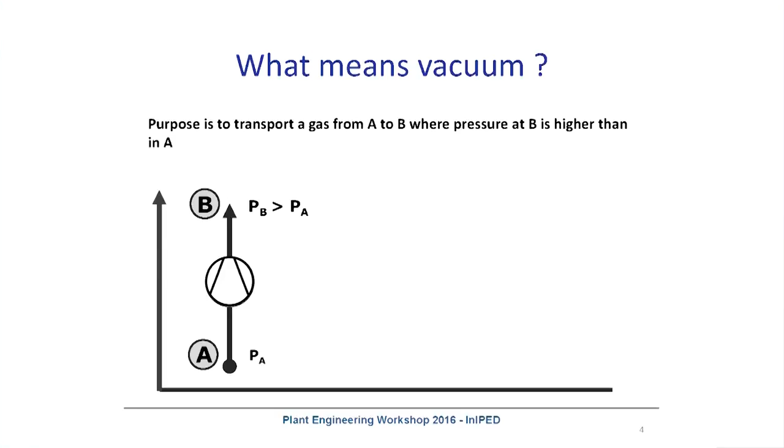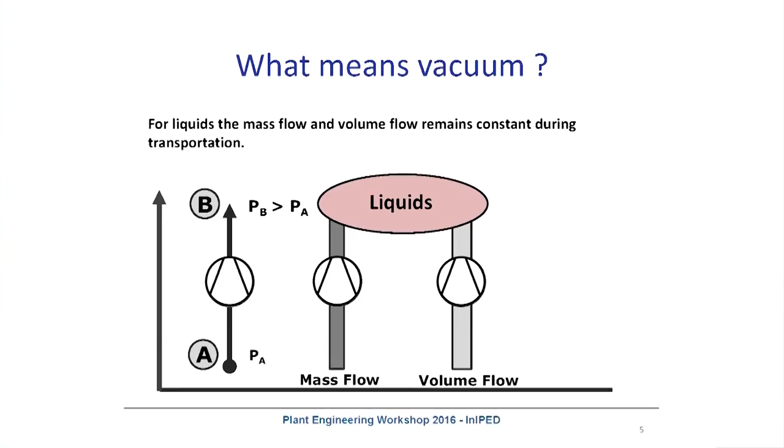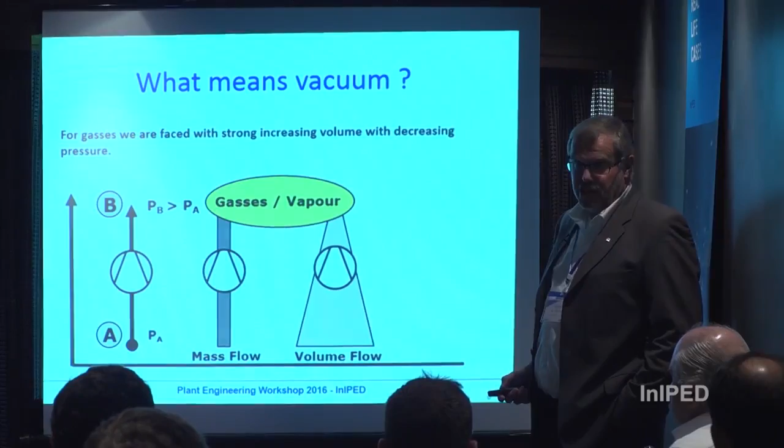What means vacuum? In principle, it's the same as with centrifugal pumps. You bring a gas from point A to point B, where the pressure in B is higher than in A. Sounds very easy. With liquids, we have a constant mass flow and a constant volume flow, because liquids are not compressible. With gases, the mass flow is also constant, but the volume flow is decreasing as the pressure rises. That means when you go down in vacuum, you go down in pressure, and you need a big pump to handle the big volume.

Yeah, so this is exactly what it shows. Normally, when you go down in pressure, you need a bigger pump, looking at the volume, than at the higher pressure ratings.

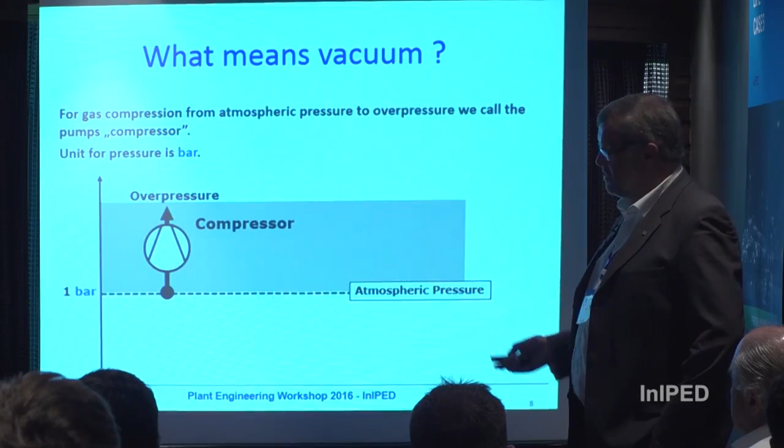When do we talk about compressor and when do we talk about vacuum pumps? There's always a discussion because the machine looks very similar and is more or less the same. We always talk about a compressor when on the suction side we are in the atmospheric range of pressure, so we compress the gas from atmospheric pressure to overpressure. Typically we talk about bar as a unit for the pressure then. When we talk about vacuum, we mean a pump which handles pressure below atmospheric pressure and compresses it to atmospheric pressure. In this case, we normally talk about millibar, and that's the major difference.

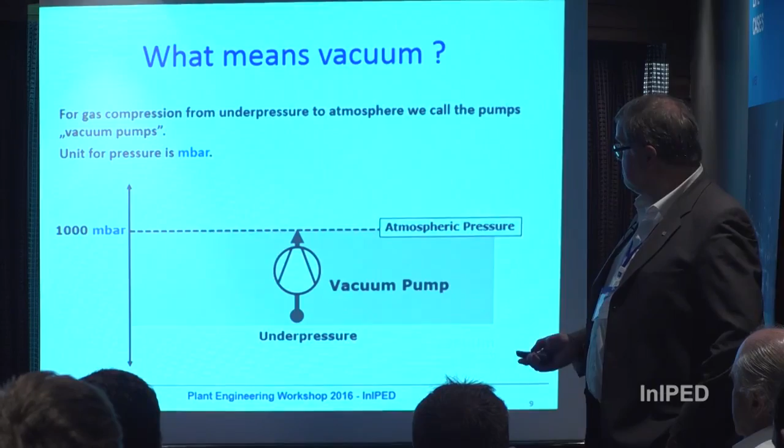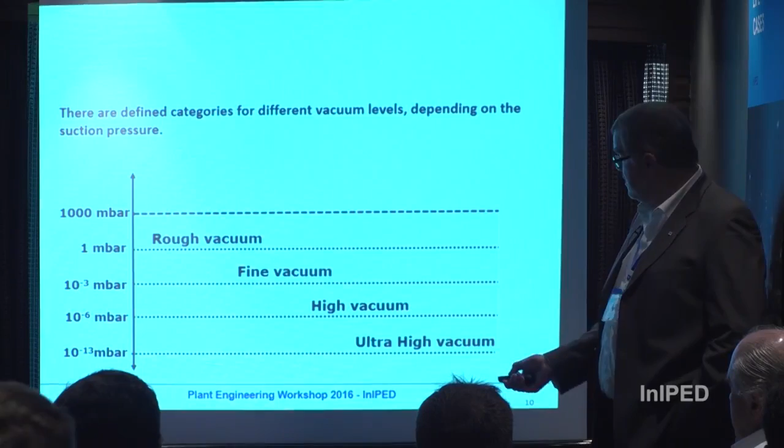On the vacuum side, we have different steps of vacuum which are defined. We have the so-called rough vacuum, which starts at 1 millibar absolute and up to ambient pressure. The fine vacuum goes down to 10 to the minus 3 millibar, high vacuum 10 to the minus 6, and then ultra high vacuum to 10 to the minus 13 millibar. For the applications mentioned in the beginning, in chemistry, petrochemistry and so on, we're normally talking about the range between 1 millibar and atmospheric pressure.

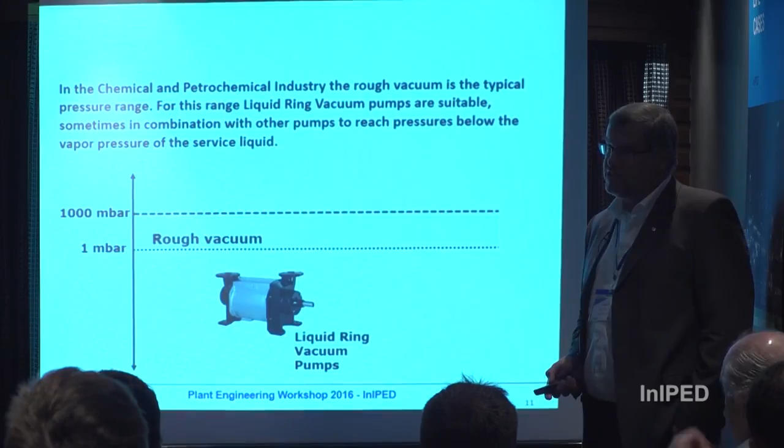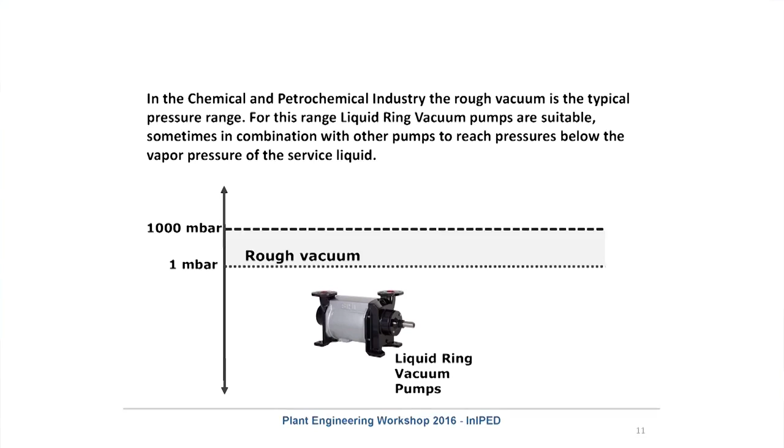In this pressure range, liquid ring machines are operated. For lower pressures, liquid ring machines are normally not suitable, for reasons linked to the operating principle with the service liquid, because you can decrease the pressure only down to a level slightly above the evaporation pressure of the service liquid. Otherwise the pump would fill with steam and would be blocked by the steam and cannot operate anymore.

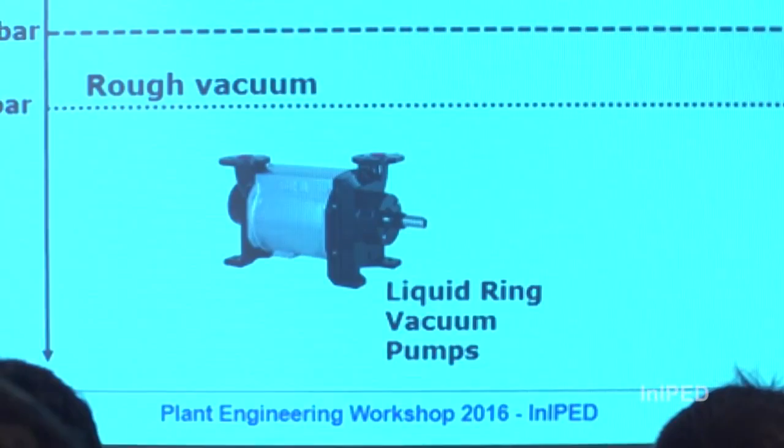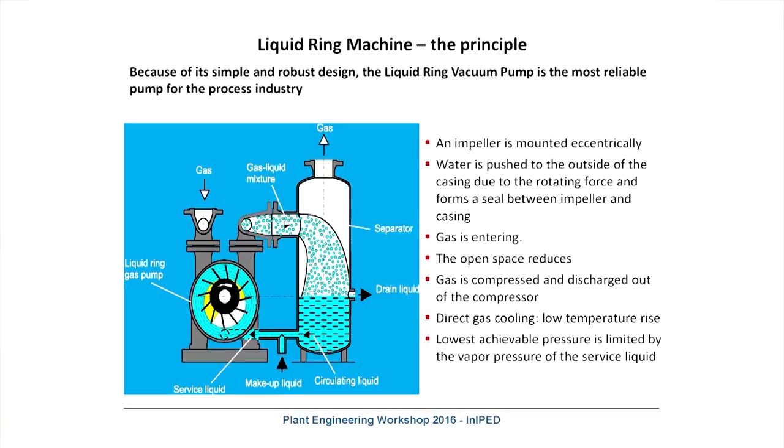Working principle: a very simple picture to show how this machine is running. An impeller is mounted eccentrically in the casing. Due to the rotating forces, the service liquid is pushed to a ring concentric to the casing. That means, when rotating, you have on one side an opening volume between the impeller blades, the liquid ring, and the hub. In this stage, the gas is being sucked in due to the increasing volume. In this stage, the gas is being compressed, and here, as the gap gets closer and closer, the gas is being discharged.